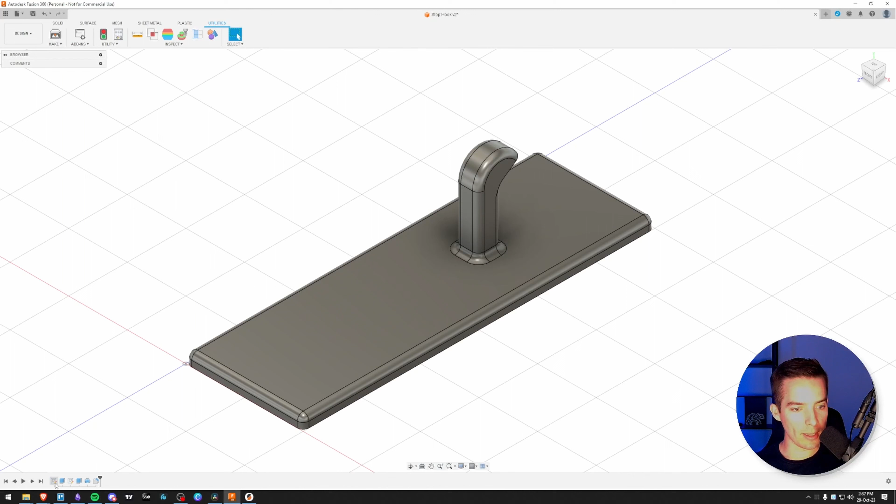So I'm going to go over how I created a little hanger for these door stops, and we're going to get into it over here. We're going to go over and start looking at Fusion 360. This is what the finished stop hook looks like. So it's a pretty simple design. You can kind of see down here in the bottom left all the steps that we took. So very simple. Got the calipers out, measured how big of a base plate I want to accommodate the 3M strips and still be able to pull them off the wall when we're done.

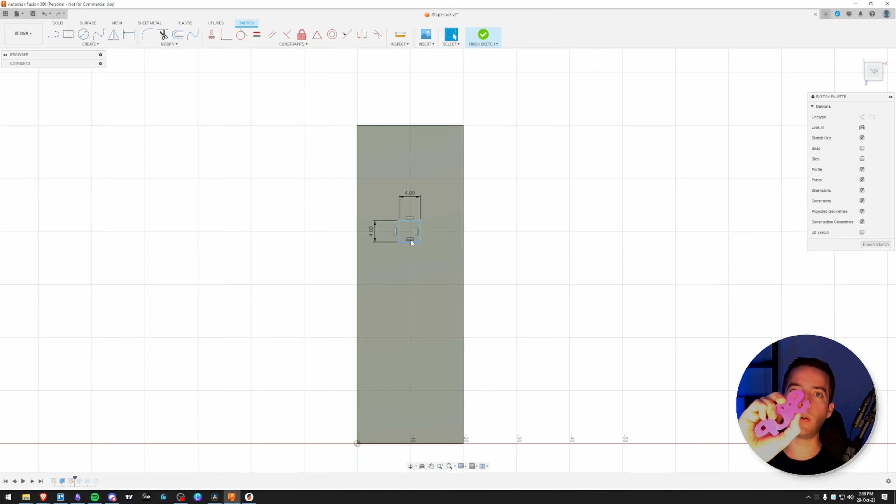So you do a sketch, do a little extrusion. So the extrusion gets us to here. And then we do another sketch, which was sketching the little post so it can go through the little hole in the S here. So there we go. That sketch is finished. And then did an extrusion. And then we added a little bit more to it for the hook aspect of it. And then did a fillet at the end to just kind of round things off. So this is what it looks like.

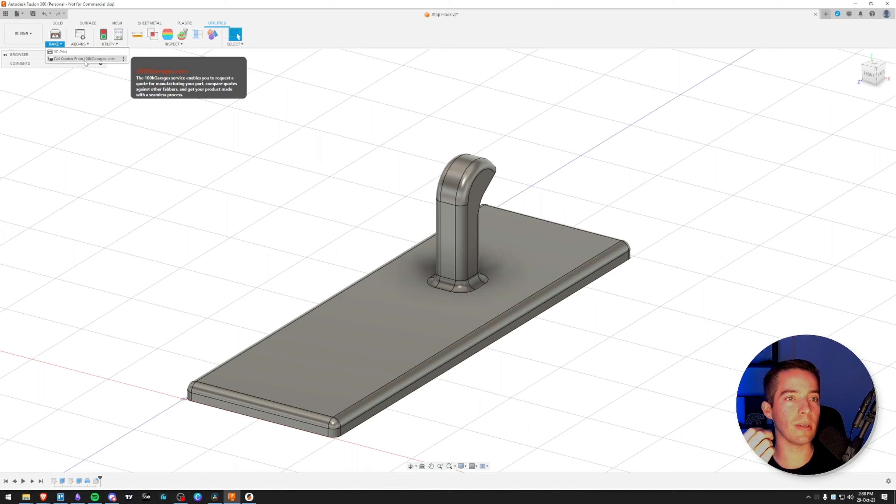And a really cool thing, if you just look up here, so it starts here in solids when you're working on things, and then in utilities, you can go in and make 3D print. So the file that we want, which is the next step in the process, is the STL. So you can go in here and you can see, here's just a link. I don't know what this website is. I won't really condone it, but Fusion 360 is saying, hey, look, you can get a quote for what this would cost to print directly in Fusion 360, which is quite cool.

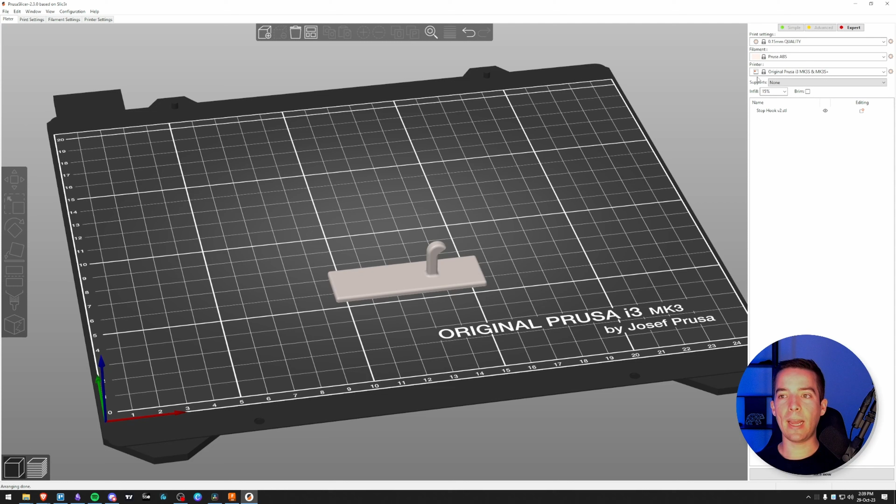So we take the STL from here, and this is the Prusa version of Slicer, which is an open source 3D printer slicer tool. And you can see I've put one of these on the build plate. This is what the build plate looks like. And I've told it over here the layer settings, what type of filament, which changes the temperatures that the printer prints at, and the printer. So you go through and you slice. And this is quite cool because this actually will show you layer by layer what it looks like.

So this is what at least the Prusa version of the slicer looks like. And if you want to make more of them, you just push the plus button. You can ask it to lay them out for you. And then again, you just slice it. And that's what it looks like. And this spits out something called G-code. You can see this down in the bottom right here. And G-code is something that will go and get spit into, you can use an SD card.

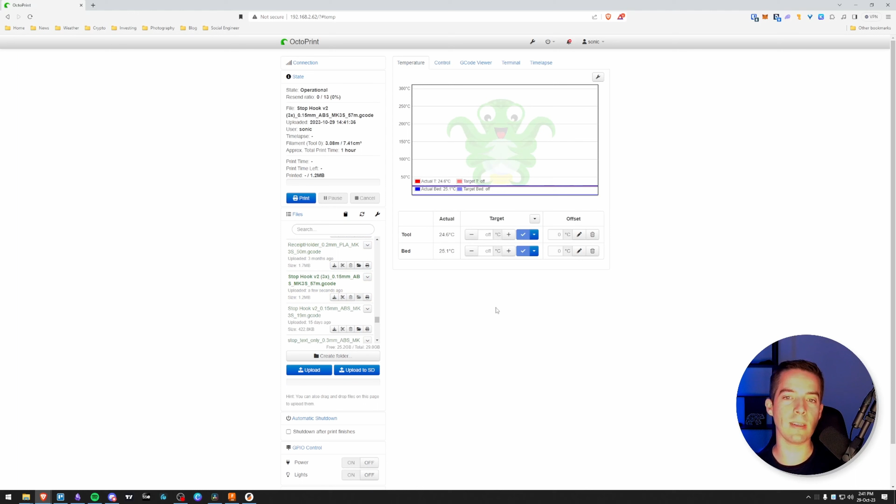I actually have a Raspberry Pi running OctoPrint, which is a little more sophisticated than using an SD card. And all you have to do is drag the file here. It's upset because I'm overriding it. So we'll just let it override it. That's cool. And then you can go in here, you can warm the printer up. And this gets into my specific printer workflow. So you can tell it, okay, I want to warm the tool up to 225 for ABS and 100. And it will start doing that. And you can control it and kind of watch what it's doing right here from the web interface.

It's quite cool. There's just a few reasons why I chose 3D printers as a hobby, and maybe that will help you make your decision too if you haven't gone down this path yet.